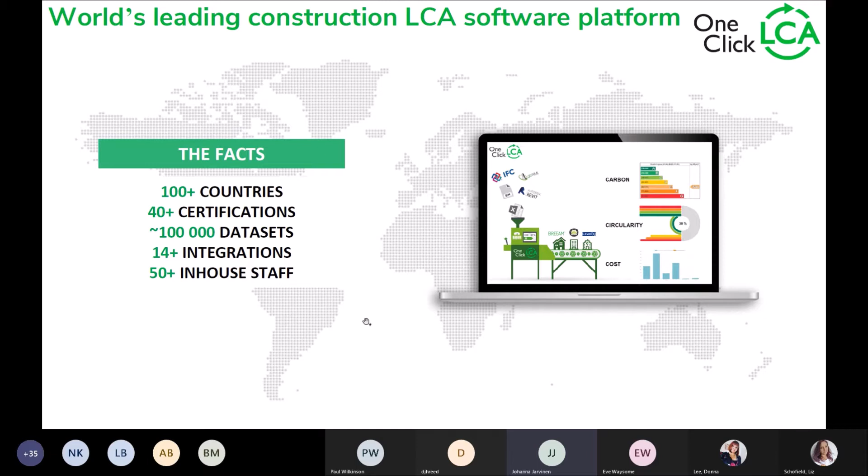So we, as in OneClickLCA, are an LCA software platform. We have different tools, we work in different countries, and we hold a lot of carbon data for designers and such like. We have different software solutions depending what you're designing - building designs and construction, then infrastructure, and also for manufacturers of construction products.

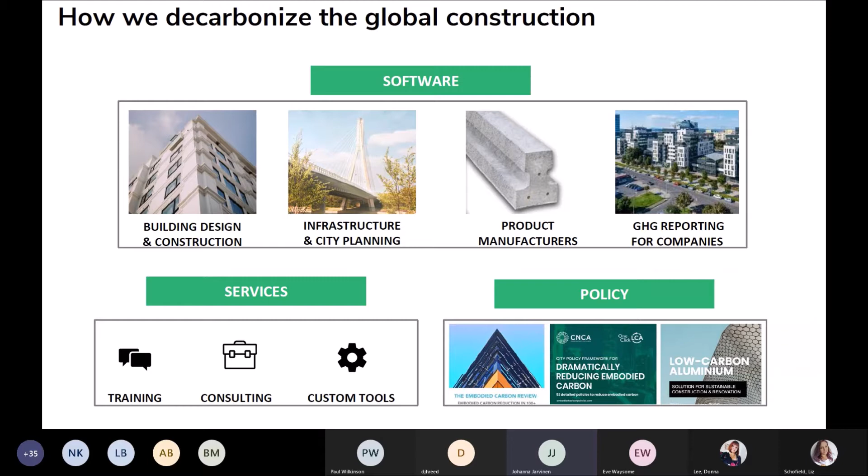We also try to put the climate emergency on the agenda by pushing policy pieces as well. So we integrate all the global carbon data from construction into our platform for our clients to use.

The software can be used for green building compliance assessments, and we integrate with loads of different BIM tools as well as other kinds of energy modeling and similar tools. Currently we have about 14 different integrations, and those are growing.

Tekla is there too, somehow it's not on my slide. Then we have other tools as well, so it's not just carbon tools, but also circularity and costing and embodied carbon tools.

So because we have quite different tools on the market, we do cover the entire construction sector as best as we can, really, from engineers to institutions and investors.

So OneClickLCA is a web application, so it's all cloud-based. Anything you want to do is done in the cloud.

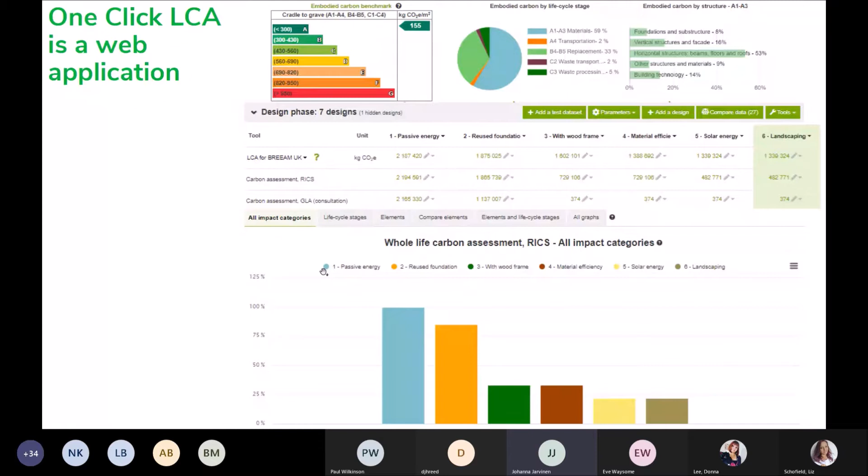Obviously, life cycle assessment is not the idea - well, it's the thing that you do, but why you do it is to test, compare, and optimize your design. So what does one mean? Probably nothing, but when you do different solutions, test different material options and different constructions, you will start to find out what and how you should build your building. So it should be like an iterative process really when you're doing LCAs.

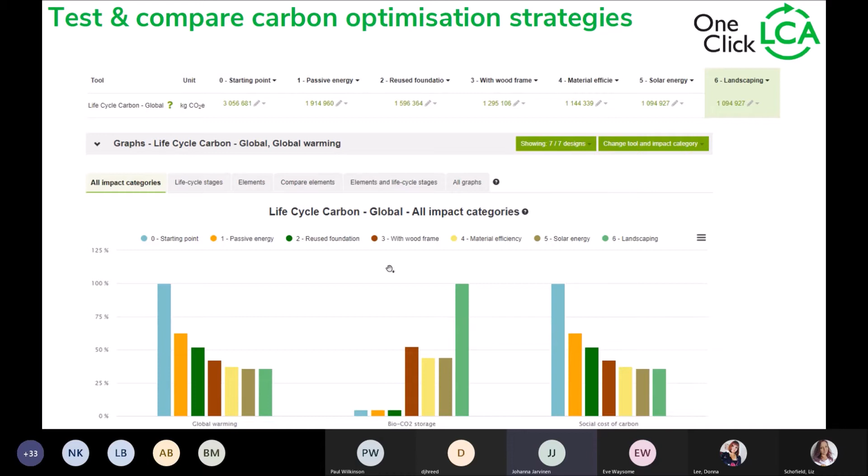OneClickLCA can be used in all projects. Obviously, you can use it without a BIM model - however, it clearly is more accurate - but there are also ways of deciding the direction in very early stages. And obviously, you can also do as-built assessments and use it at any state of the design, really.

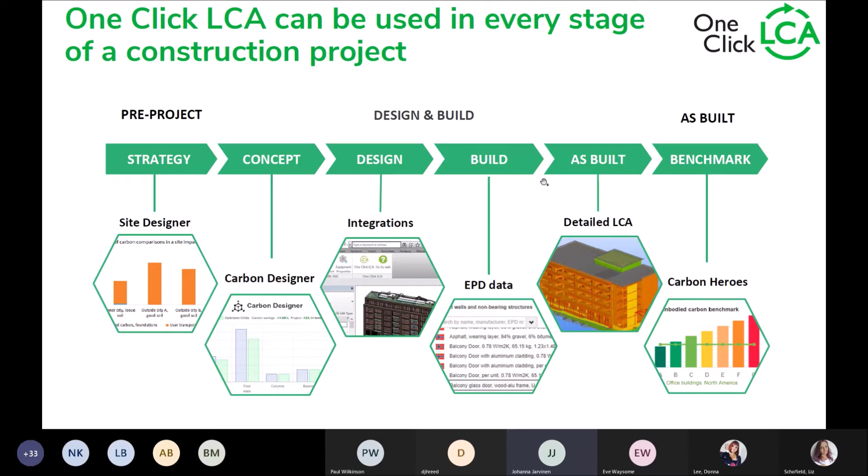And you can use it all over the world. Obviously, different countries have different tools or ways of calculating carbon, unfortunately. So in the UK, we do cover all the scopes that currently exist that you might ever need to calculate carbon for.

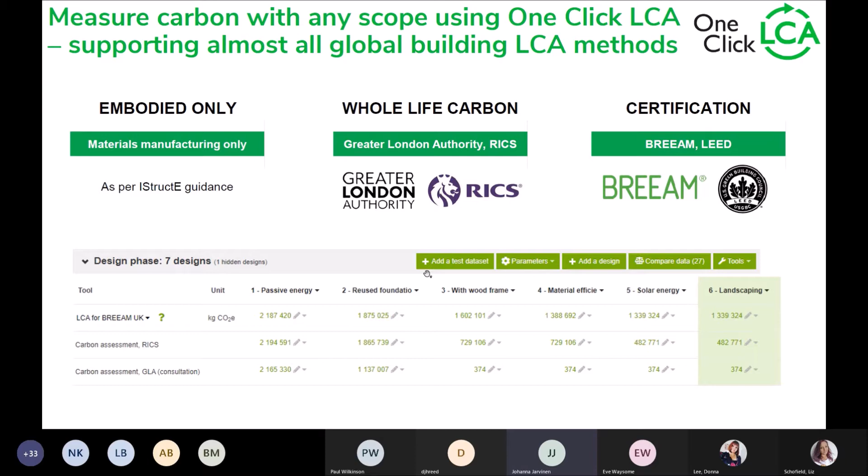So like I said, we take all the manufacturers' calculations of carbon - the environmental product declarations, what EPD stands for, is already available. You can request more data from manufacturers if you can't find your product, or use generic data, which is also available. But yeah, we would like manufacturers to do more calculations so you guys can have more accurate data.

And the manufacturers can then also use our tool, or there are other tools available to do further calculations and so on. So we have also automated the EPD creation as much as possible.

So the BIM integrations that we have work through plugins, and we also have integrations for energy softwares like IESVE, Design Builder, and some other Scandinavian EDI integrations. Design softwares new to the family are Rhino and Grasshopper, which is a good addition, especially for early stages.

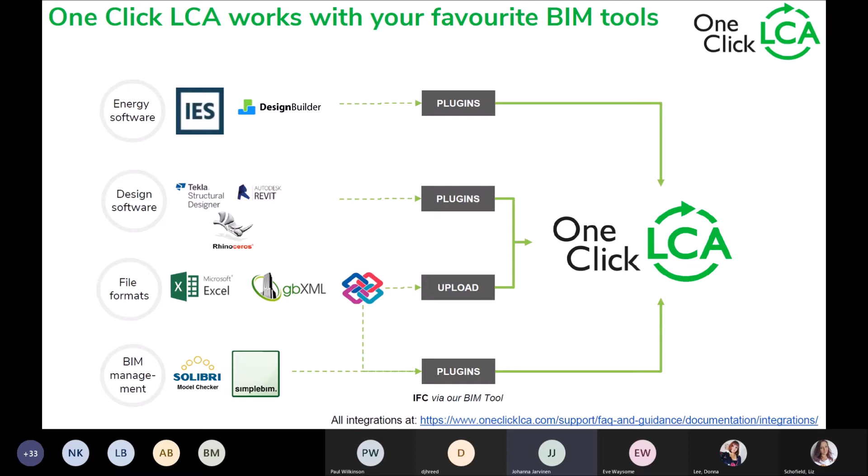And then we also have integration of BIM management tools, and we also have an IFC reader so that if you don't use any of the integrations that we provide, you can still use your IFC model and see how that performs.

So the reduction potential of your design is highest at the earliest design stage. So if you decide to build nothing, then that's the best solution really - however, I guess we need to make some money and build buildings.

So then there are 2-3 other things you could do: build less, build clever, build more efficiently, which obviously BIM models can be really useful for. In any construction project, the highest carbon reduction potential is in the early stages.

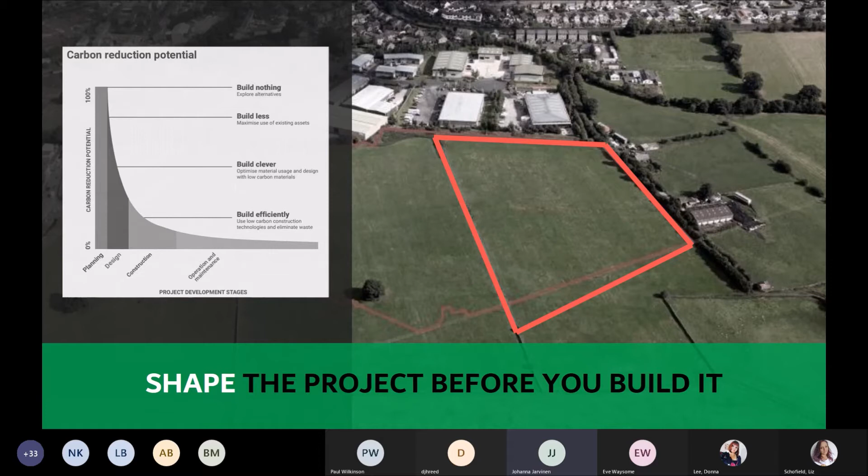So from the BIM tool point of view, if you are using Rhino, Grasshopper, or Tekla Structural Designer, these have the highest potential for early design carbon reduction. Revit models and Tekla Structures are great in a design sense, but you have to have quite a full model before you can do much about it. So these have been evaluated to have the highest potential. If you want to impact early, these kinds of tools can have great results.

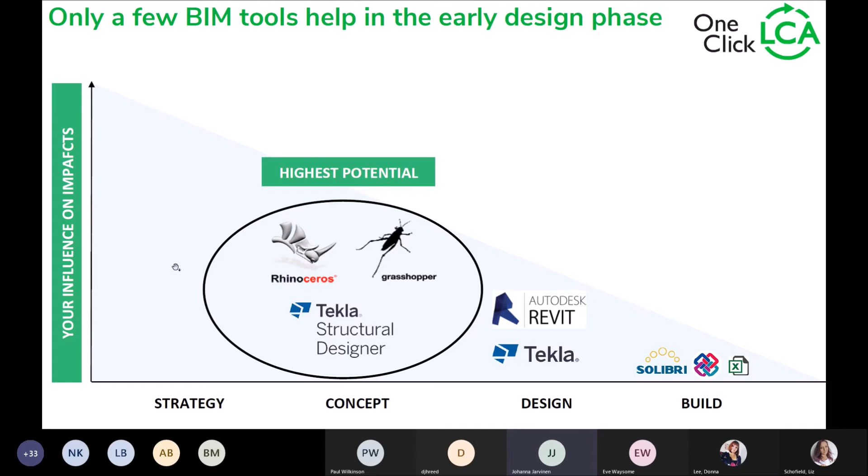If you have a wider design team doing the drawings and design optioneering, but you don't have access to a platform, maybe someone in your design team has. You can send them data - they don't need your Revit license or Rhino license. You can just send them the quantity data and they can assess it on their end. So it can be helpful without being our licensed users. You can just create a free account, send them data, and they can continue doing your carbon work for you.

And also, if you don't have a drawing yet, we have a tool called Carbon Designer, which just by knowing the gross floor area, number of floors, and building type and country, lets you create yourself a carbon model, so you can see where the embodied carbon is mainly situated, so you can concentrate effort to reduce in the right places, or already select some options just for selecting lines outside of your drawing.

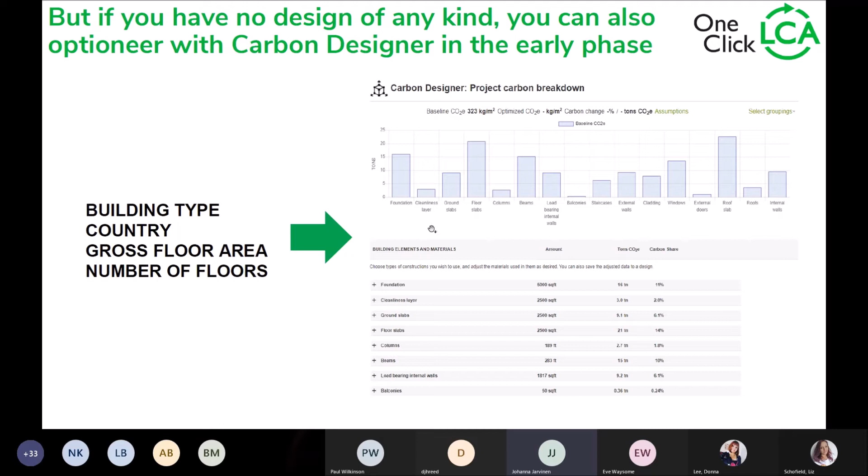So I was going to talk about 3 different integrations which have the highest potential: obviously Revit, which we've had for years, then Rhino, and a little bit Grasshopper as well. By all means, I'm not the BIM specialist, but we have rewritten the Revit plugin recently, which gives you a bit more freedom of the information into the Revit environment.

It works via a two-way API, so there are 2 ways of working it. You can work in the Revit environment where you get mapped things that come from our software, and you can see your highest carbon hotspots. Or if you want to continue the assessment and do further work, you can send the data to the cloud as well and carry on working in the software side. So you can do either, depending on how much.

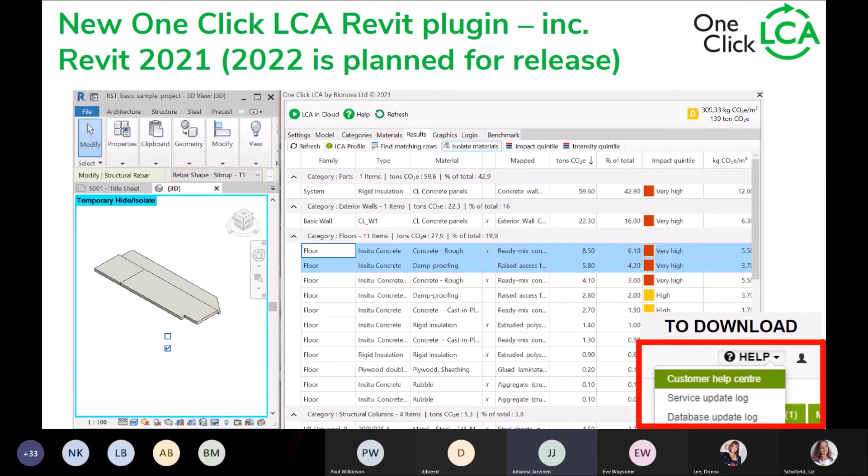If you're just testing different materials, then it's quite quick to do in the plugin itself. You can find the plugins in our customer help centre, and from there, more information too. The new rewrite works perfectly with 2021, and 2022 is planned for release soon as well.

So what we're aiming to do is get all the data for this already in the plugin. So on any of the data cards, you can see the carbon potential, the global warming potential, and everything about the data points already in the Revit environment without going to the software.

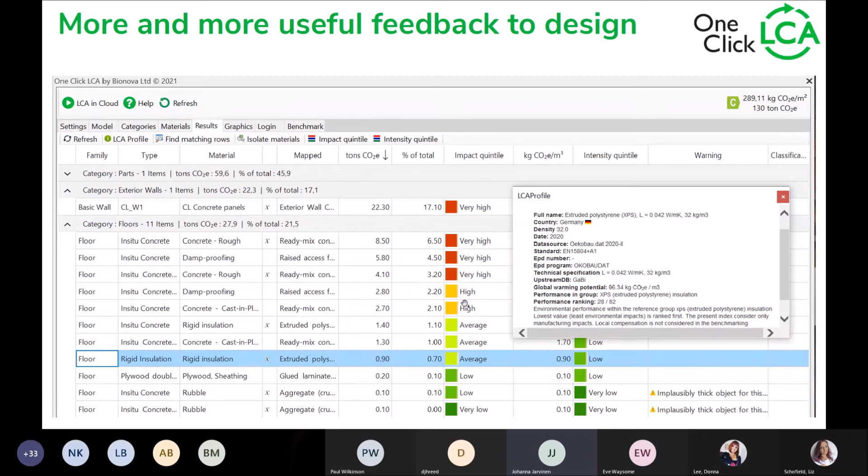Basically how it was revised is because we would like people to be able to use early stage models, and now you have two different ways to group these things: either by keeping objects together, or you can split the objects. So if you keep the objects together, you can use readily made assemblies - if it's not layered, you can take an assembly EPD or our self-made assemblies and already have your whole wall carbon footprint.

But if you have all the layers, splitting the objects will give you more accurate information, and all your layers will get a carbon figure themselves. So there are two ways of working that. It's dockable nowadays - before it was a bit clunky on that side. Also the default units have been thought through for you, so they're more accurate on the quantity side. So floors might come as area, walls will come as volume, pipes come as length, and so on. There are a few of those things there.

The Rhino integration is quite interactive, so if you're a Rhino user, you'll probably find it really easy to use. It has 4 tabs that explain what you do. You use the objects there, basically assigning materials to a geometry in simple terms. So you have a geometry, then you take the layers, and then you assign materials.

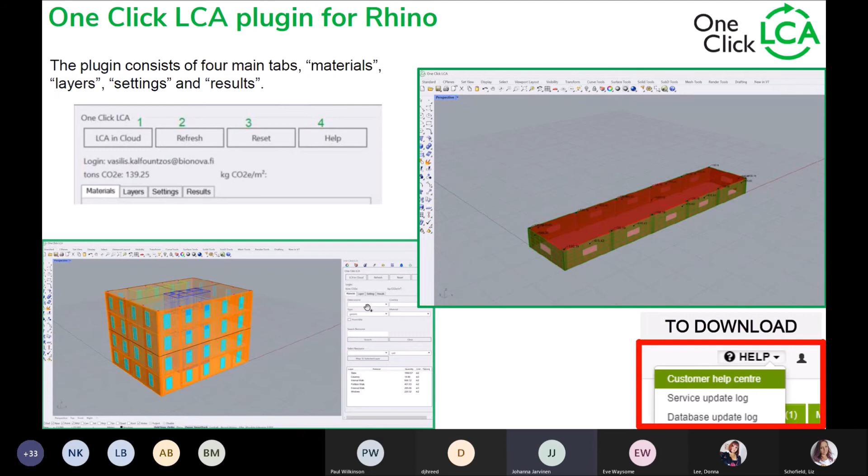The Grasshopper itself, if you are a Grasshopper user, this probably makes perfect sense to you. It's all about defining your building parameters and seeing in real time how it's changing the object. This was moving earlier, but it's not moving now. I don't know why, maybe it doesn't work on the objects.

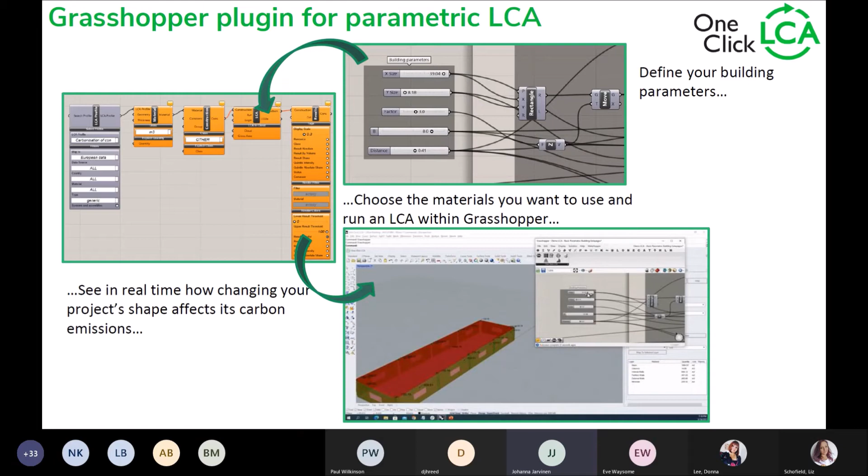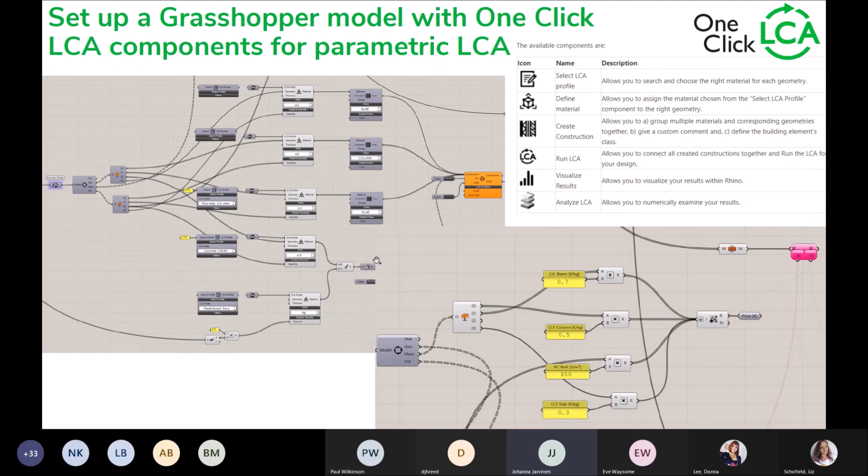You can in real time see how the project shape already can affect the emissions. So what you do in principle is load the model, and then by using the components, you can link your materials and make constructions out of them. So you select the LCA profile, define your materials, and then create the construction by plugging your parameters together. It's quite intuitive if you are a parametric design person.

It can be used with Galapagos and Octopus depending what you are thinking of doing - shape optimizations or multi-criteria optimization. It has lots of potential, I think, in the carbon world, especially as things are moving more towards the

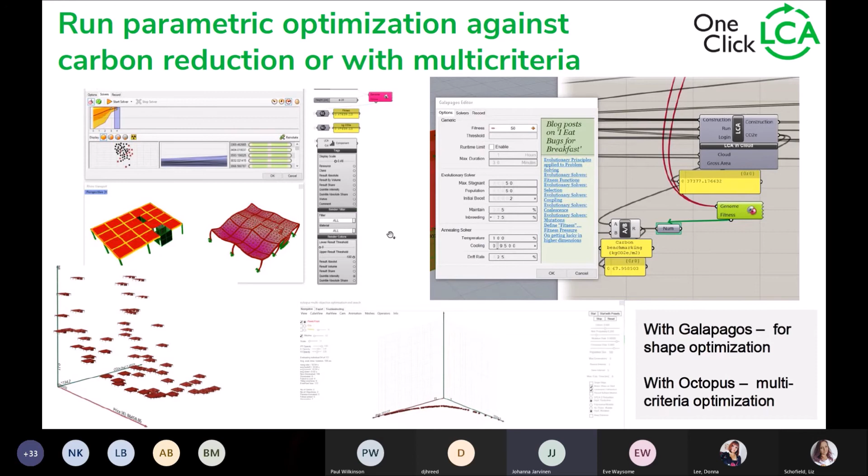parametric way. You can trial the software if you want to. You find the plugins from our software site. If I have my Revit and this internet connection to go, I'll quickly show the plugin

itself for Revit. So you can see here we have some different options. You can select your splitting materials and so on. You can set different models, so depending what you have here. You have different categories, so if you don't want to include certain things, you can turn layers off and on, or split object to materials.

And this will then, depending on what categories you have, read the materials from these categories. And then you have your materials here. Currently, these are not mapped to any material.

But when I click here, there's two ways of getting your mappings. You can do it manually - you can just start writing things, and you will find all the materials in here as long as you're logged in. And you can send this to a cloud, which goes completely to the software side.

Or if you click here, the results, it will try to map them automatically by using the naming. So if you have a plasterboard, it will try to find you a plasterboard, and then you can further refine it. So you can do the work without going anywhere from the Revit side. You can get your mappings set in here as much as you like.

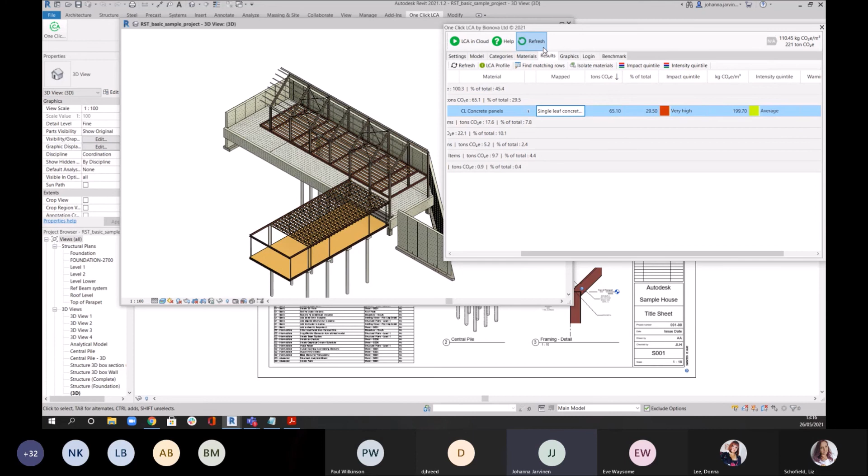This can take some time, especially today because my internet is not working. So this is in principle how it works. You can get the results here. So now we have some single leaf concrete, for example, and it tells you the carbon, and clearly it's something that is high. You can also then isolate the materials and see where it is that this comes from.

So if you had some, now you can see these are all mapped. If I want to see what this ready mix concrete floor is, you can have a look. And if you want to then trial some different materials, you can just start mapping it to some other material and see how that would maybe work with some other concrete with some recycled content, for example, and see if that makes any difference on the carbon.

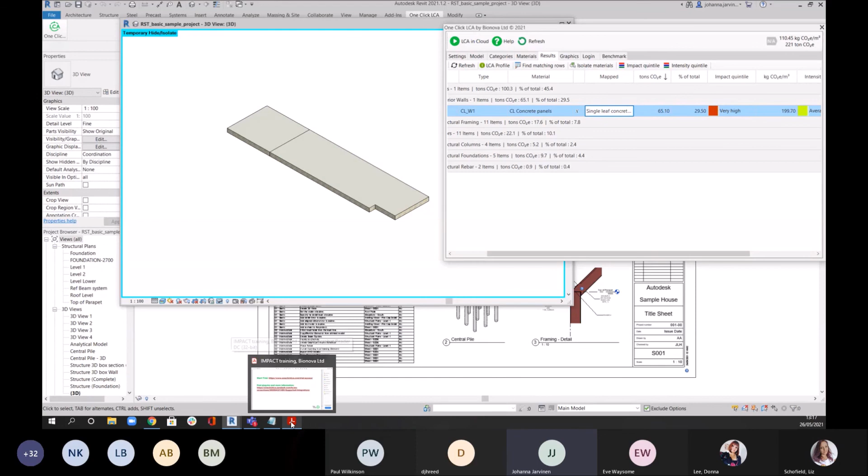So you can do different kinds of work in here. That's the kind of things you can do. Or if you want, then once you've done your optioneering, you can obviously send this to a cloud and carry on doing some further work in that sense. That's in a nutshell really how our software can help you on the carbon side.

It is obviously important that we are moving towards low carbon buildings and reducing energy consumption in the buildings alone. It's not really going to be enough in that sense.